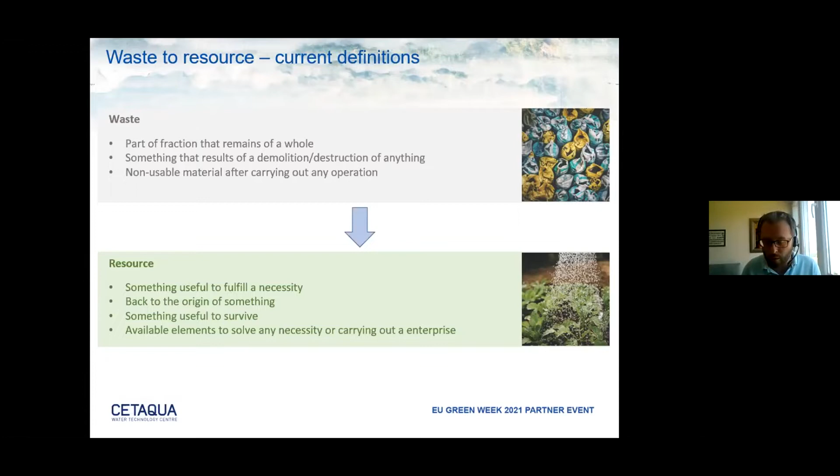As you know, waste is a fraction of a whole, or a material that is no longer used after some kind of activity has been performed. This should be part of the past. So we have to make our small contribution in order to make this circular and come up with resources. That is something useful in order to meet a need, or a good or service that is required to carry out something in particular or make something become real. So we want to do this, we want to turn waste into resources for different purposes.

At Cetaqua, coming from Agbar, we were historically tied to the comprehensive cycle of water treatment. In Santiago de Compostela, the Agbar center treats water from a comprehensive perspective, so that is our core business. These are the wastewater treatment plants. Little by little, we are moving towards the industrial sector, also placing an emphasis on wastewater facilities.

We are also trying to work on reclaiming water, stepping outside of the biological systems that normally prevail in water treatment and cleaning. So we do our best in order to use reclaimed water, that is to say water coming from households is cleaned, and then additional properties are put in order to use them for garden watering, for irrigation purposes, and also for street cleaning.

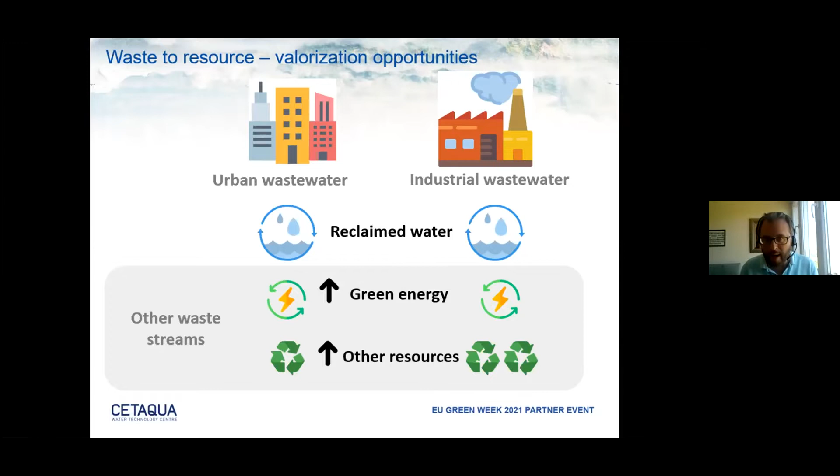We also do our best so that all the water coming from households can be caught in order to produce green energy by running some biological processes. So carbon can be turned into an energy generating gas. We also try to catch resources from solid urban waste. Martín Códax spoke about this already.

We are used to working in wastewater treatment plants that are mainly located in urban areas. Today, in Santiago or in any other Spanish city, normally we transport water from cities or from a certain source to cities. We spend a lot of money to treat that water, and then we bring that water back into its natural source. When modern facilities exist, created after 2020, we can reclaim water quite effectively and efficiently.

In this case, all the waste coming from these wastewater plants, that is to say the sludge, is subjected to an anaerobic process in order to obtain biogas, which is a source of energy that can be used either to produce electricity in the wastewater plant itself, or else it can be subjected to other processes in order to use it for other purposes.

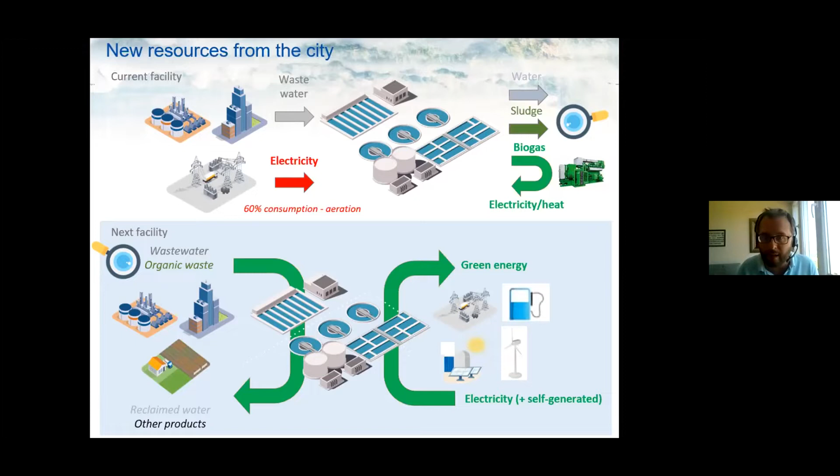In addition to carbon, we will also take into account nutrients that are found in wastewater. We will explore new ways of reclaiming phosphorus, for example, in order to produce fertilizers that require low application. That way we can use these fertilizers little by little in such a way that soil can better absorb all the fertilizer load without contaminating water layers, as happens today with the application of traditional fertilizers.

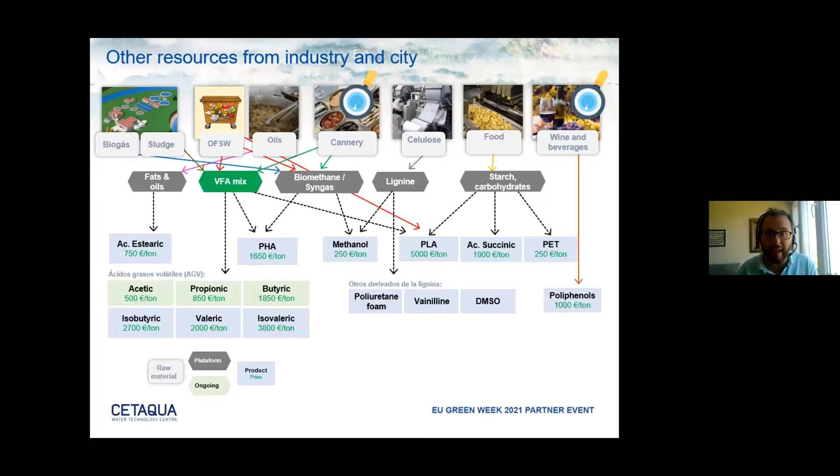As you can see here, there's a lot of theory behind reclaiming resources. There's a lot of scientific literature available on the matter. This is something that you can find in many databases. These are the different limits showing how far we can go. We know that we are not going to live forever, and therefore we need to make our small contribution by putting in place different initiatives in order to reclaim resources that today are considered to be waste. We can therefore keep them in the value chain, therefore reducing the exploitation of natural resources.

For instance, in the case of grapes, as we heard before, there are some compounds called polyphenols. The Cigat Biofactory project is working on polyphenols by applying a physical separation process. We want to run an ultrasound process in order to obtain polyphenols that can be applied in different industries. For example, polyphenols can be used as a raw material in other industries, such as in the food industry, in the cosmetics sector, or in food and beverages at large.

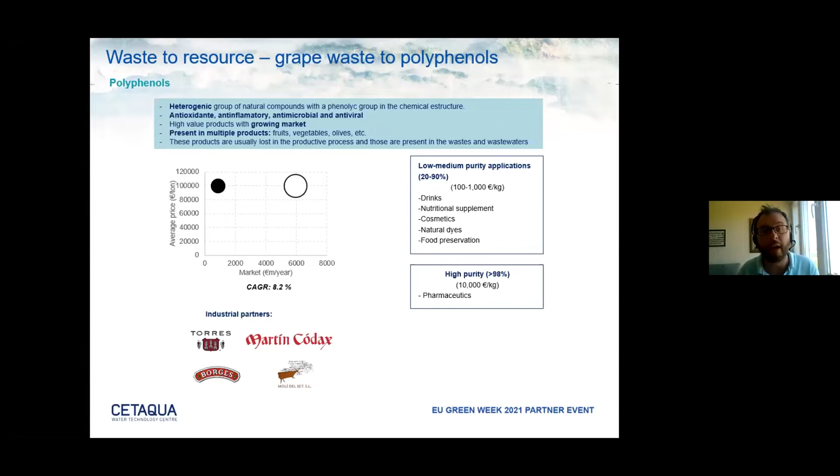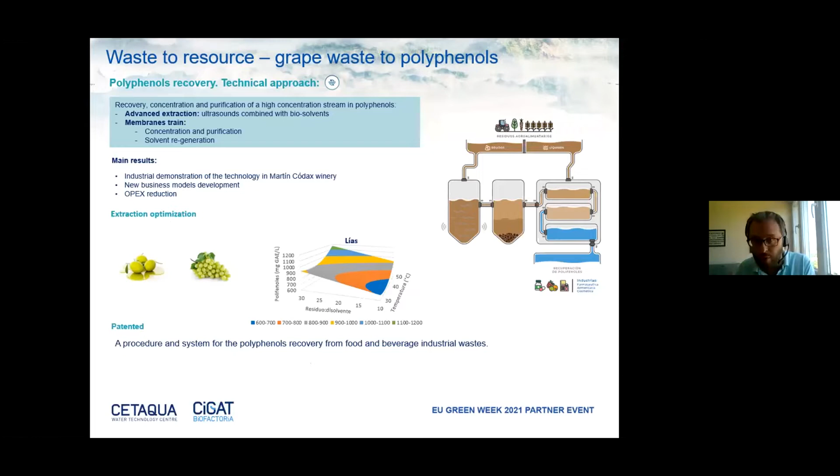Within the framework of the Conserval and the Cigat Biofactory project, we will be able to obtain what we call volatile fatty acids, or VFAs. For example, we will be able to obtain acetic, propionic, and butyric compounds that today are found in the petroleum industry, even though they are similar to petroleum chemistry. We want them to come from waste sources after an anaerobic fermentation process. We want to obtain these acetic, propionic, and butyric compounds by using biotechniques.

For example, in the case of the canning and the dairy sectors, we can apply a fermentation process followed by a separation process that we are now working on. We can also use biomembranes in order to obtain purity levels that can be as similar as possible to these compounds that today are found in the petroleum industry. The aim, therefore, is to have VFAs that can be marketed in other industries, for example, to produce bioplastics, polymers, and also oils and fuels.

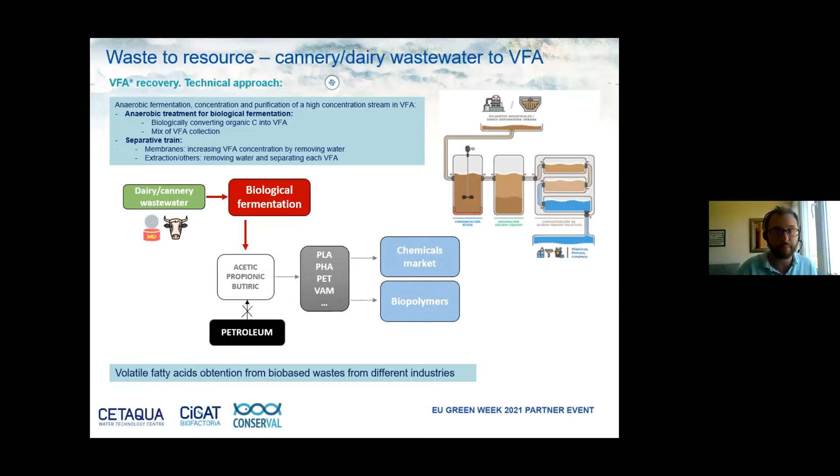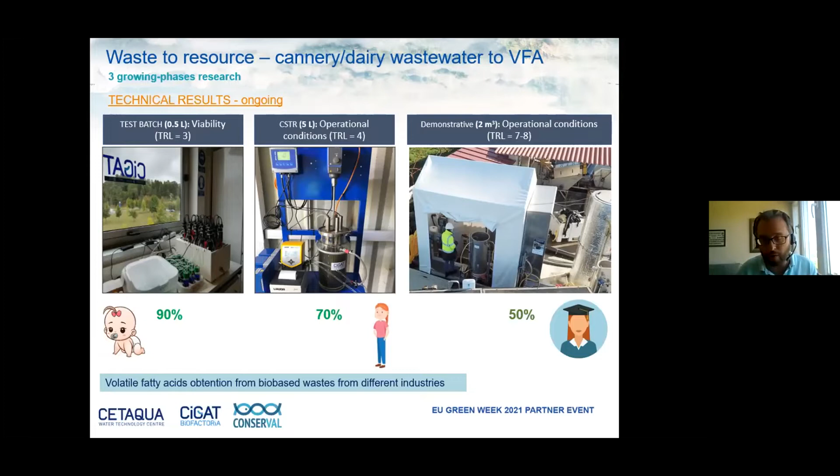What are we doing at present? We are still at an incipient stage. We are taking some baby steps. In the case of the canning and the dairy sector, we can turn VFAs up to 90% with different degrees of purity in each case. Now, if we move forward at a technical stage, we are doing this at 70%, and at pilot scale, we are transforming carbon at a rate of 50%, and we believe that this rate could be further increased. So we will be able to double the amount of carbon in the form of VFAs.

Cetaqua is well acquainted with water-related processes because we have more than 150 years of experience in this area. We know that sludge contains many resources that are not being exploited. So we believe that right now this is not being managed, or it's actually being managed as waste, but VFAs are not being obtained. Therefore, we want to start using not only industrial wastewater, but sludge coming from wastewater plants. We want to therefore create acetic, propionic, and butyric compounds. And we want to take one step further if possible.

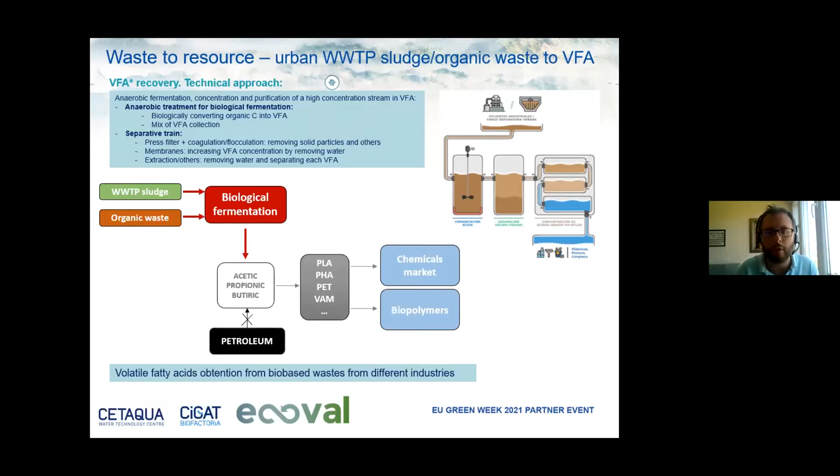In addition to sludge, we are also trying to aim at organic fraction solid waste processing. In addition to sludge, we would also like to introduce OFSW in order to increase the volume of VFAs. And that way, other industries will be able to obtain bioplastics, oils, and other consumer goods by using these resources.

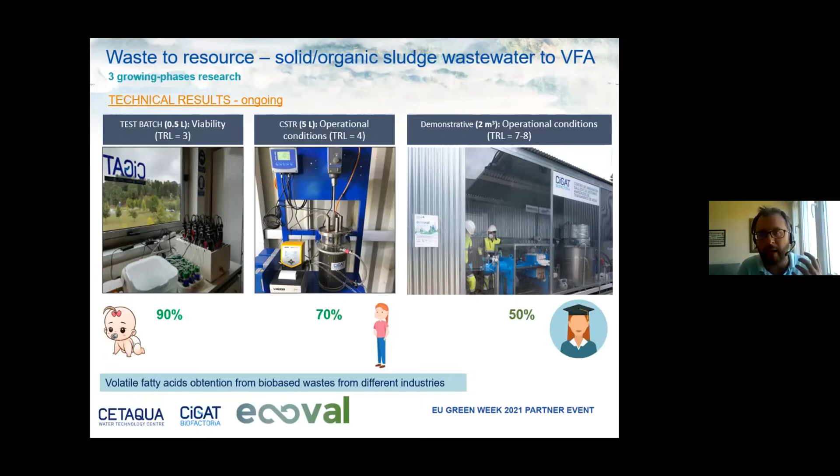We are also working on different experiments at a larger scale. We have also run some surveys, and we have obtained satisfactory results. We intend to increase, therefore, the resulting volume of VFAs.

In closing, just like some of my colleagues said before, all this experimental work is in line with the EU strategies, Madrid strategies, and the government of Galicia's strategy. Everything we are doing is intended to foster the circular economy, by putting in place all the actions that are being promoted by Brussels, Madrid, and Santiago, always in accordance with the European Green Deal,

and of course with an outlook on attaining the UN SDGs. And that's all.

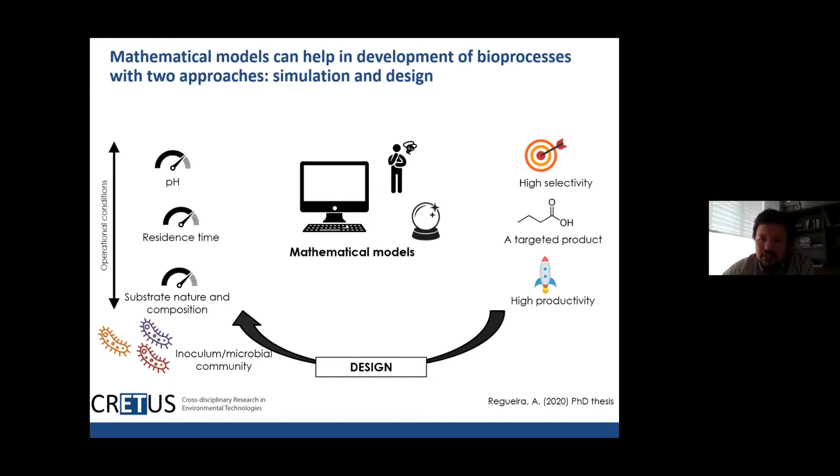And we have other ways of using these models by design. Let's suppose that I want a high selectivity of a certain compound, for example, of butyric acid in a particular product. What kind of waste can I use to get there? Under which conditions should I work? I know that this may sound kind of rocket science, so let me try to throw some light by giving you a concrete example.

These are the VFA biofactories that Álvaro also mentioned during his presentation. This biorefinery or factory for VFAs is an interesting concept because it's highly versatile. It can be used with different kinds of waste with little separation. It's highly flexible. And this flexibility eventually leads to obtaining VFAs, for example, acetic acid, propionic, butanoic acid, among others.

And the second step is to turn those intermediate products called platform-based products into a whole range of products that could be very useful. All these are chemical products that can be turned into fuel generating products, for example. They can be used to produce bioplastics, electricity, among others.

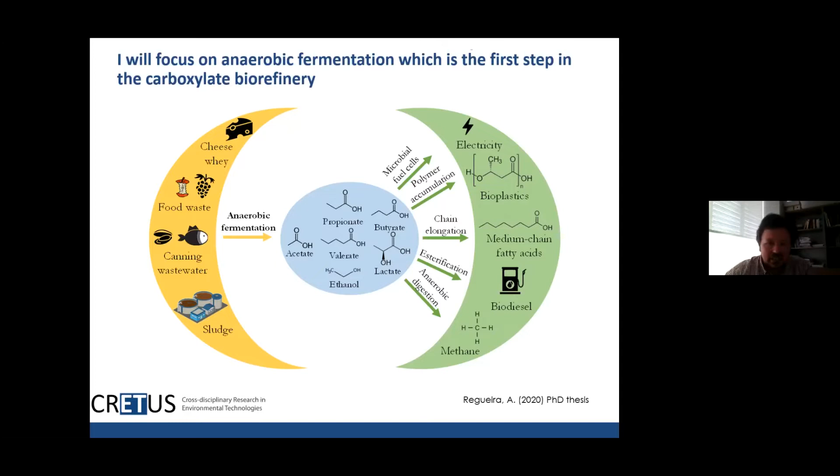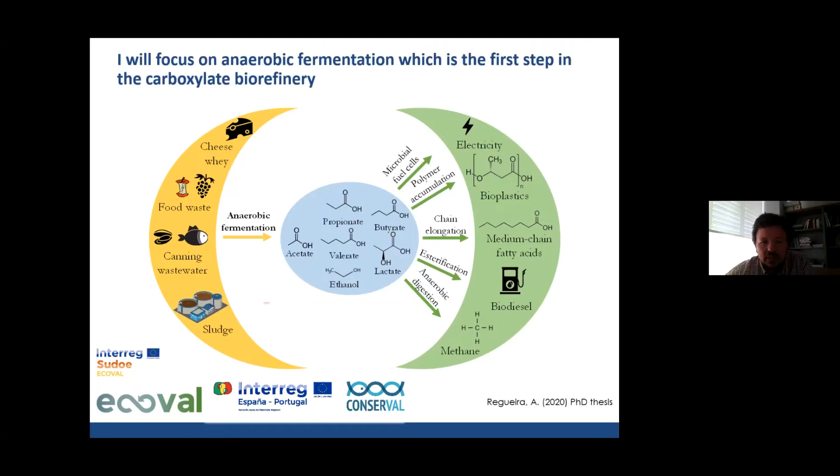At the University of Santiago de Compostela, in our center, we have been working for many years in designing processes for bioenergy. We are now working with Conserval and Ecoval. Álvaro also mentioned these projects before. The first step in carboxylate refineries has to do with anaerobic fermentation in order to transform organic matter into these end products. So how can we apply mathematical models in order to obtain VFAs?

The first step is anaerobic fermentation that leads to VFAs, but sometimes it's very difficult to predict. It's always going to be a mixture, and it's difficult to see which compounds will prevail, if any. Besides, these prevailing compounds may vary to a great extent and not in an obvious manner according to the substrate and the operating conditions.

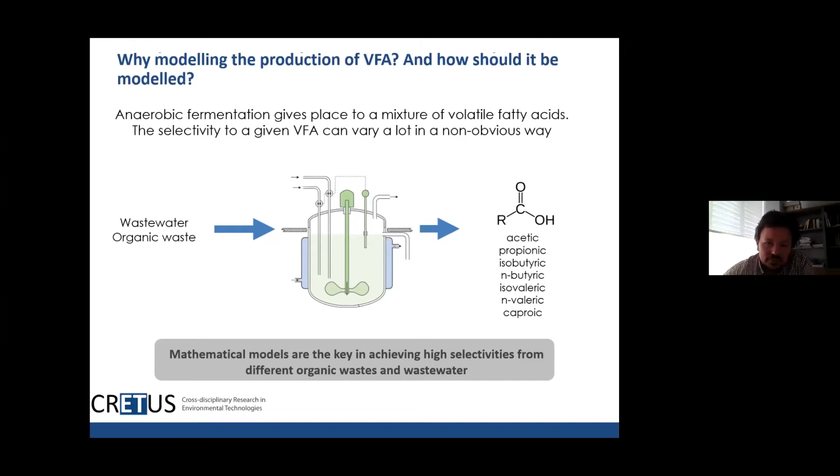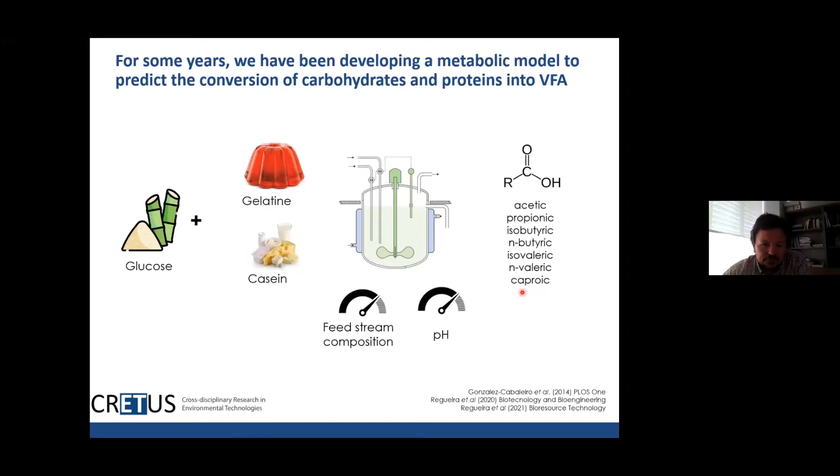We have worked to show that mathematical models can be key in predicting the products that could be eventually obtained with high selectivities in order to obtain products from recovered waste. For many years, we have been developing mathematical models at metabolic level in order to turn mainly carbohydrates or waste containing high levels of carbohydrates and proteins into VFAs. So this kind of waste eventually results in VFAs. These are the intermediate VFAs that we are interested in.

Well, we can apply a number of biological fundamentals. We know, for example, that in fermentation processes, these products are the ones that will allow cells to grow more or obtain the greatest amount of energy possible. As I said before, this can be depicted mathematically.

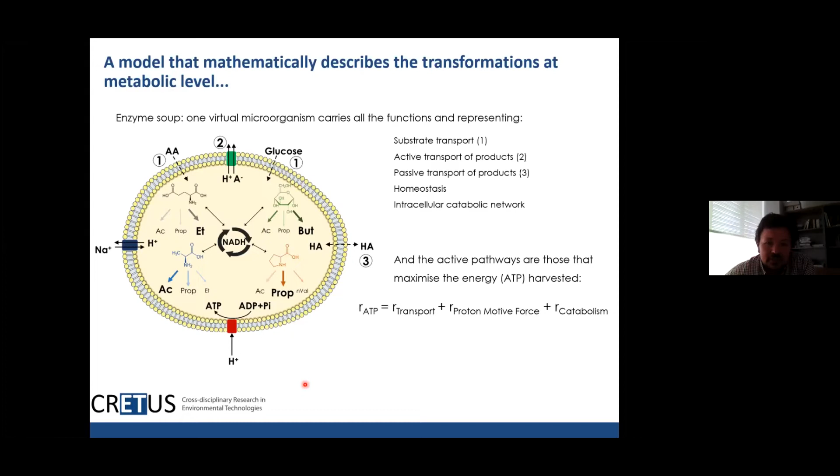So, of course, this can also be translated into more quantitative calculations. Within the framework of the Conserval project, we want to predict not only how VFAs are produced, but also how salinity in the wastewater of canning facilities will affect the production of VFAs. Therefore, we need to expand our mathematical models, taking into account the metabolic transformation carried out by microorganisms in their cells in order to face this salinity or saline accumulation that sometimes can be tough on microorganisms.

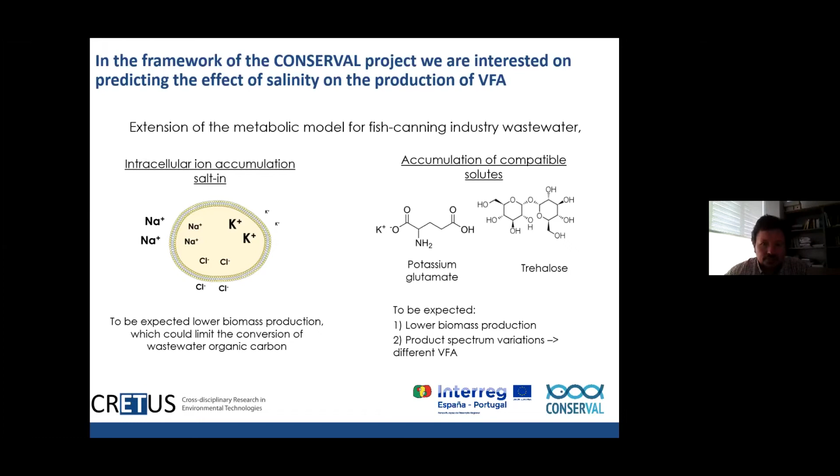Here we have represented different behaviors, mathematically speaking. For example, there is an adaptation strategy that is called salt-in. This means introducing other types of salts, like, for example, potassium ions to compensate the sodium ions, or else the accumulation of compatible solutes to allow cells to withstand salinity better. How can we tell, or how do we identify the strategy being followed by each cell?

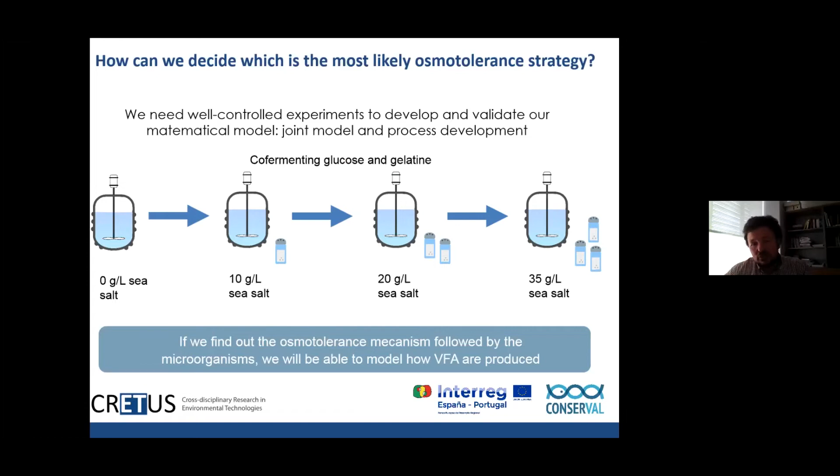Here we're trying to develop bioprocesses by applying mathematical models. So we will have to run experiments at the lab in order to validate all these models. We have some reactors used for fermentation, for example, for carbohydrates and proteins with different salt concentration levels, and that enable us under controlled conditions to learn which mechanisms are applied by microorganisms to see how they withstand salinity and how this affects the products that we are seeking to obtain.

So the salt-in strategy, for example, will not alter the VFAs that might result. That's quite interesting. However, the amount may be lower at the end, or they may be produced more slowly. We also know that producing an ex-novo compatible solute, these may be interesting compounds. For example, there are some products that can be used for cosmetic purposes. This, however, requires a high level of energy consumption by cells, and therefore this may lead to a reduced amount of VFAs.

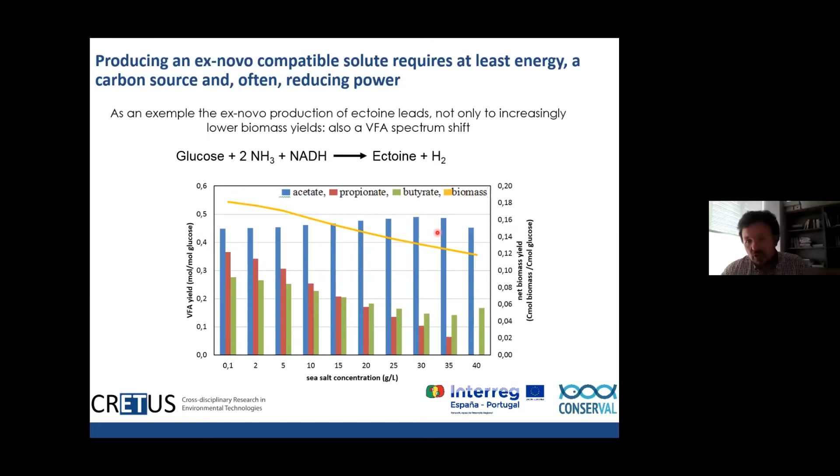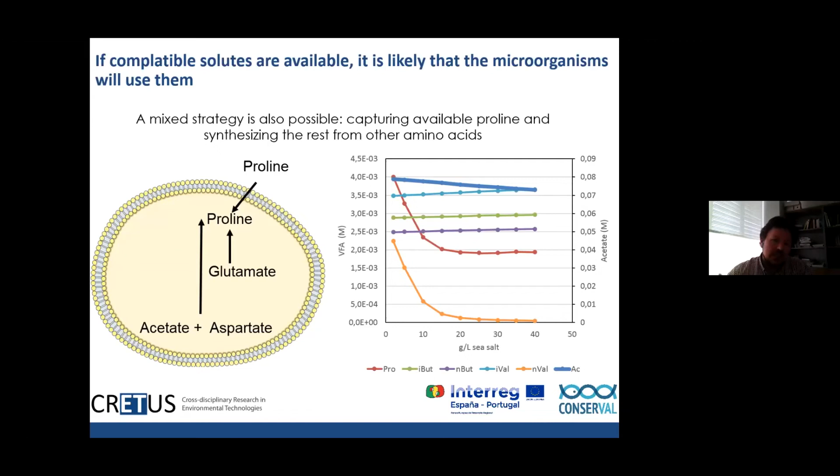Therefore, if the cell is producing this compatible solute, this happens with glucose, for example, we will go from a fermentation of this kind, that is acetate, propionate, and butyrate, to another one that will be more acetic. So we can have intermediate situations as well. We are using compatible solutes that can also be substrates, so the change of spectrum here will be different. By bringing all the experiments together and running our models, we can do some predictions as to what is going to happen. And how do we use this to develop bioprocesses?

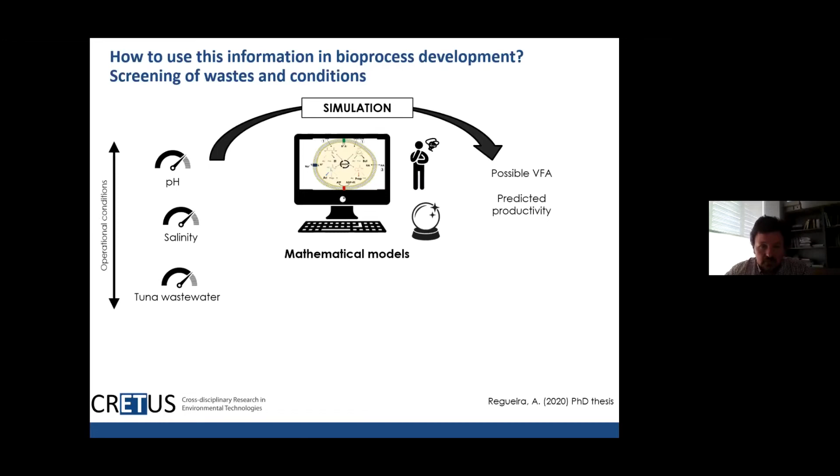As I mentioned before, we have simulation. We can screen the different wastes and the simulation conditions. We can try out different wastewater material from treatment plants, or, for example, organic matter from industrial facilities, or solid waste. Alternatively, by choosing a certain product and certain selection criteria, we can also decide how we can better mix different waste or residual sources, or whether we have to add a chemical compound that can act as a compatible solute so that microorganisms in canning water can withstand salinity.

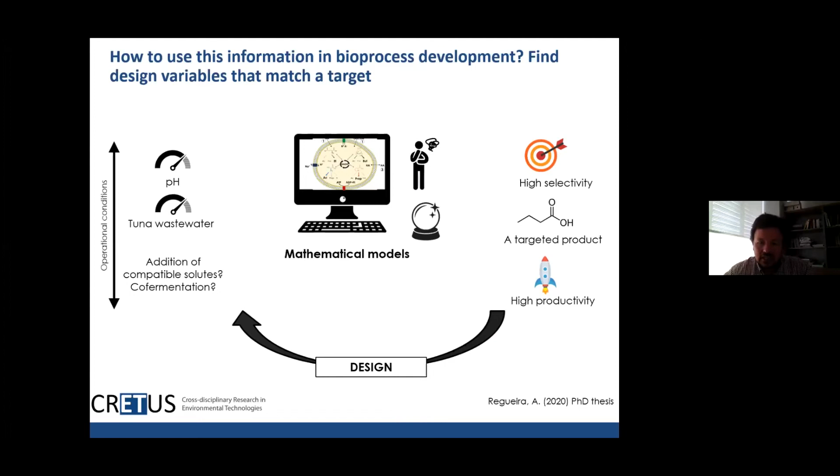Perhaps we have to use some kind of product with a high content of viscera. So by developing these models, we can produce much more effective processes contributing to the circular economy.

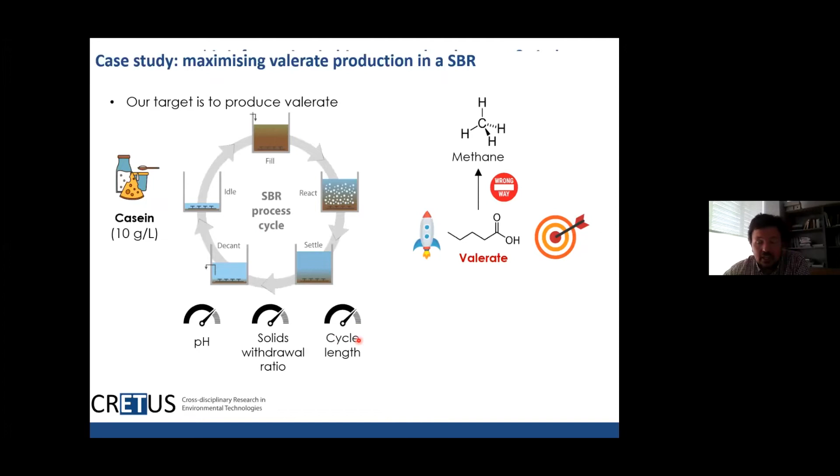This is another example. If we wanted to maximize valerate production in an SBR using wastewater containing a certain amount of casein, for example, water from a dairy producing plant, by changing the operation variables such as the pH or the solids withdrawal ratio or the cycle length, trying to produce valerate while avoiding producing methane. Well, according to the goal we pursue, here you can see the cycle length and the solids withdrawal ratio.

If our goal is to maximize selectivity so that we can turn waste into VFAs mainly, we will have to work at short cycles, at short withdrawal ratios, and with a pH near 5, where we have the maximum selectivity possible. However, if we have a different productivity aim, we are going to also work at short solids withdrawal ratio, but this is kind of risky because one portion can turn into methane if we deviate too much.

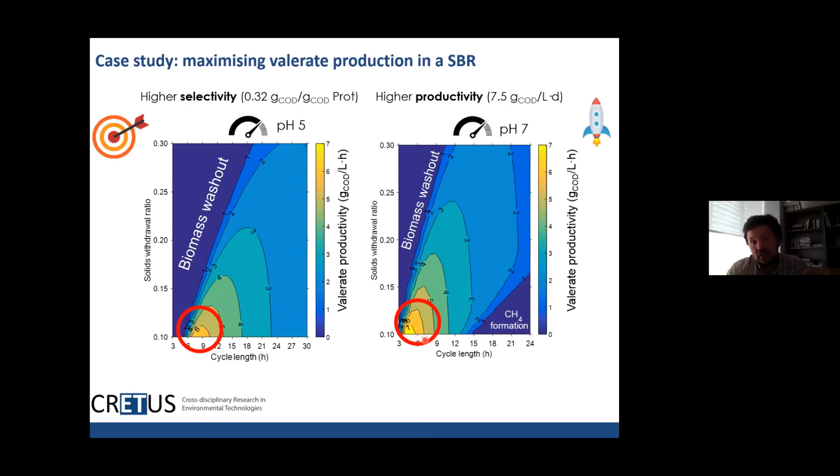Productivity, however, in this case would be higher in order to obtain this particular fatty acid. This is just a biological model with some inherent error. All the same, this might help us to check the pilot plant results, to reduce the range of the design variables, and therefore develop bioprocesses and get closer to attaining the goal set.

And in closing, I'm certain that we all know that developing bioprocesses is tough, but mathematical models can actually make it easier. In the case of the carboxylate biorefinery, it's quite flexible to turn waste into energy. Models can help us in improving selectivity in this case, while providing us better understanding and narrowing down the operational space, but experimental work will be required on the relevant variables and also in developing processes.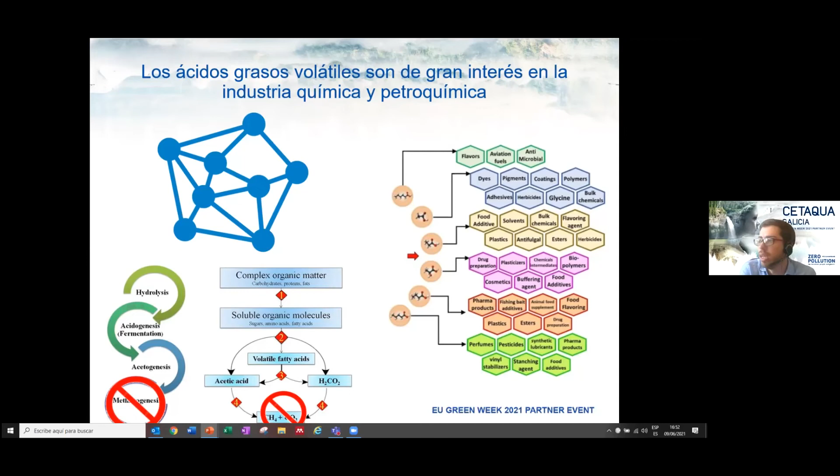We have as goals to continue with these models in order to implement them into other types of real waste, such as sludge, urban bio-waste, the canning industry waste, that have different types of organic compounds. So we were focused on how to produce fatty acids, selectivity, productivity, etc. But I'm going to focus now on what happens from that point. What happens once those fatty acids are produced and fermented?

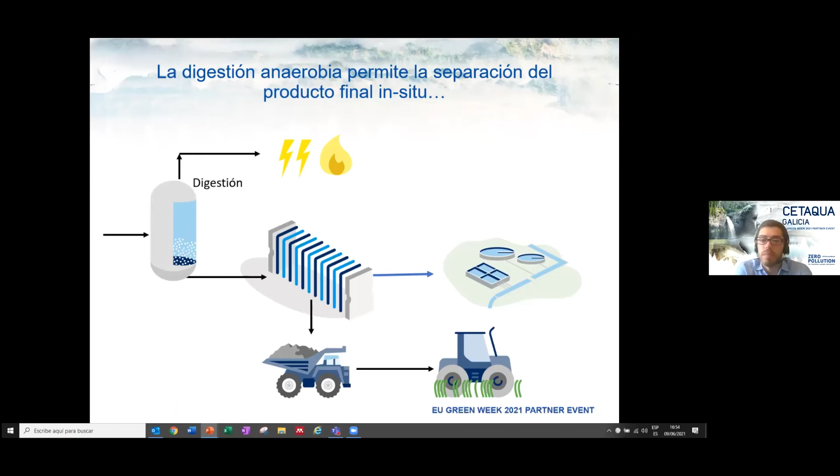There is a significant difference with the conventional process of anaerobic digestion. It is a process with 3 stages: solid, liquid, and gas, and we achieve an in situ separation of the product. Once the organic substratum has been turned into biogas, this biogas is separated from the medium where it is produced. For example, in a water treatment plant, this is used to generate electric or thermal power for the needs of the plant. Then the solid or semi-liquid part of the digestion can be dehydrated. The liquid one goes to the plant, and the solid one is used for agricultural purposes like fertilizers. So the entire process is used.

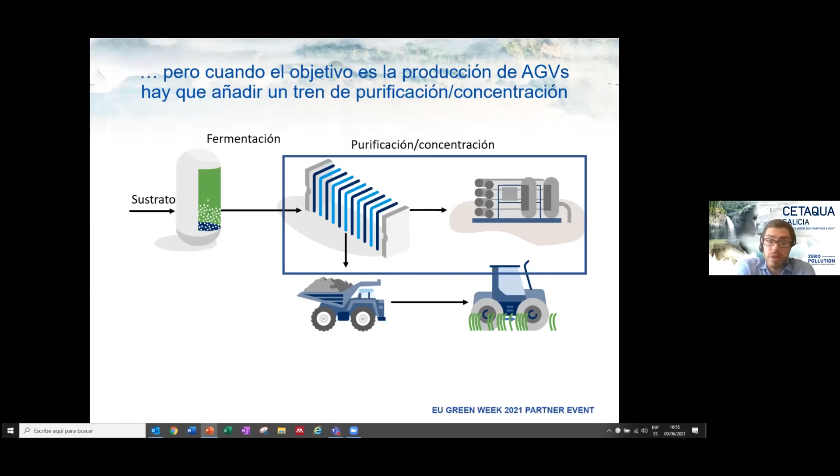And when the objective is the production of VFAs, we need to add something, because there is no in situ separation without applying energy, and this separation can be complicated because we are talking about a fermentation of sludge or bio-waste where we have a concentration of acids of 5, 6, 7, 8, 9, up to 10%. So in 1 ton of that output from the fermentor, we still get 900 kilograms of water. Separating that water is not easy.

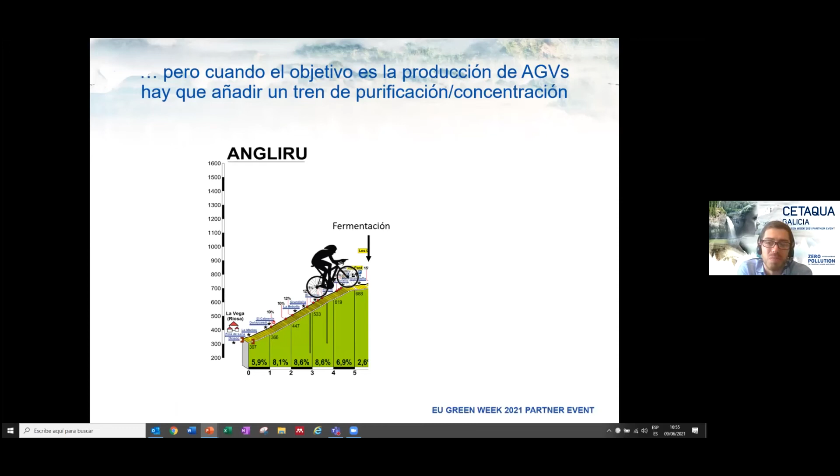So to give you an example, maybe you like cycling: when you are going up the mountain, you look back and you say, okay, the part that I already covered looks easier. But controlling the fermentation and stopping these reactions on the acids in order not to reach methane could be the easier part of the process for different reasons. For instance, because we are already there, so what we have already done looks easier.

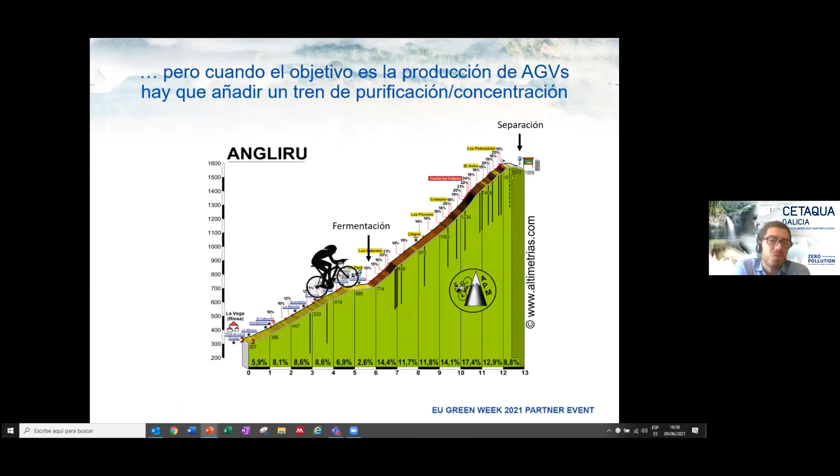But I'm going to be quick. I don't want to bore you with technical details. But the first difference with a biogas system could be that the dehydration of the sludge or bio-waste can be à la carte. So I'm going to explain myself. We get a solid stage with the waste that was not transformed, with the biomass that transformed it, and a liquid part with these VFAs and other types of compounds.

How do we achieve this separation to get solid and liquid stages? By adding chemical products such as surfactants or flocculants that interact with the negative parts that surround the sludge. So the sludge comes together and it separates from the rest. But the chemical products usually used in sludge management not only put together this solid part, but also, due to this electrostatic neutralization, they also take part of the soluble compounds.

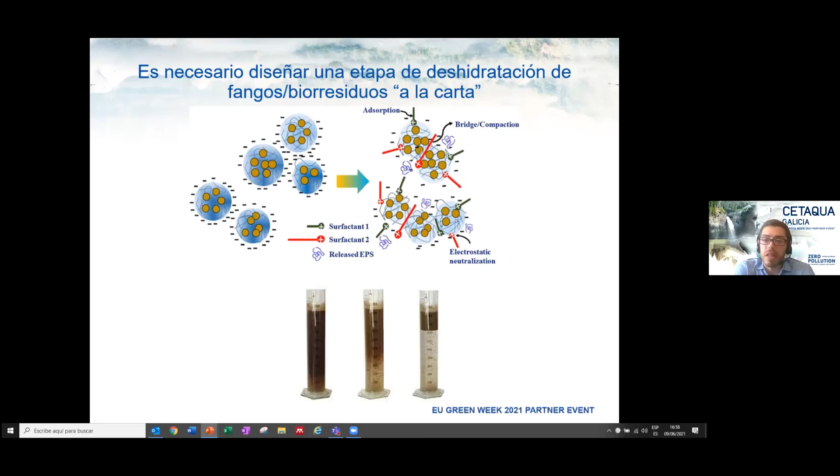So what we found is that conventional chemical products take those acids with them to the solid part, and therefore, if we can't separate them in the first stage, it makes no sense. Luckily there are other, more specific compounds. It is true that the precipitation of these acids is not prevented 100%, but we can reach 85%, 90% of separation in liquid mediums.

So we are talking about a concentration of acids of not more than 10%, and for final users like Repsol, for example, as Carolina was explaining, showing interest in new products, the quality criteria need a purity of more than 95%. So we need to add stages to concentrate and purify these acids. And I think that the technological development here is a little bit slow.

In the fermentation stage, we know that if we do a series of things with some parameters, we get fatty acids. Sometimes we don't know why, but we have other technical alternatives. One of them would be the application of micro, ultra, nano and reverse osmosis membranes: microfiltration to eliminate compounds like suspended solids that were not eliminated during the precipitation stage, ultra and nanofiltration for smaller compounds to be separated from the acids, and then a reverse osmosis process to withdraw the water from the system.

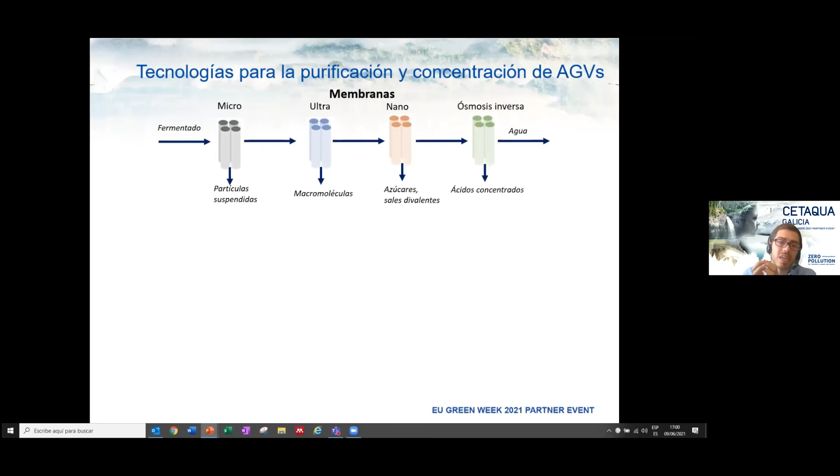This technological trend is being promoted, but the results right now show that we cannot reach the necessary concentrations to market this dissolution of volatile fatty acids.

Within the Conserval project, we are focusing on adsorption and desorption. The fermentation liquid is in contact with a surface that, given its chemical and physical characteristics, retains these VFAs, and the rest of the compounds can go through it. Once this surface is saturated, depending on the surface, with solutions such as ethanol, these acids are separated and recovered.

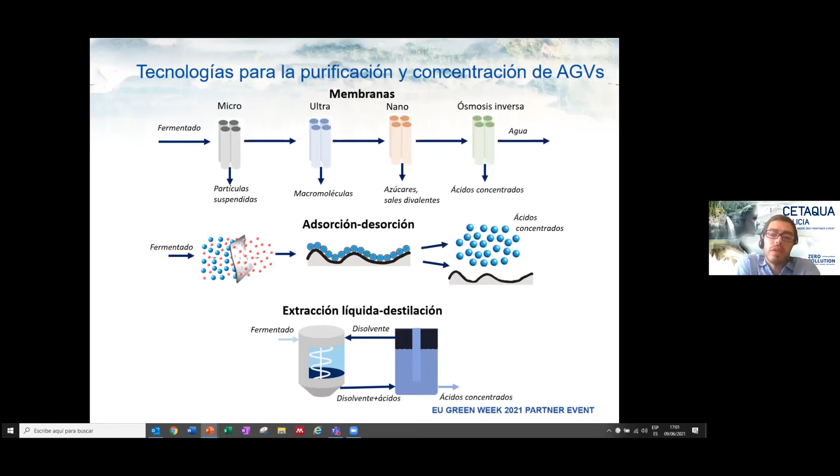And then a third example that we are promoting within the Ecoval and Conserval projects is liquid extraction and distillation. An example for less technical people would be when we mix water and oil. They do not mix; they separate into two phases. So this technology has an extraction part where we use an organic solvent that takes the volatile fatty acids to this organic phase, which could be the oil, and we obtain a product that is not interesting, which could be the water that was with the VFAs.

But then we need to separate the acids from this organic solvent. So a distillation column takes place, and there is an additional advantage here, because once the fatty acids have been separated from the solvent, this solvent goes back to the extraction column. This is the only way of having a feasible and economically viable system, because the solvent used, if it cannot be reused, could be more expensive than the acids produced.

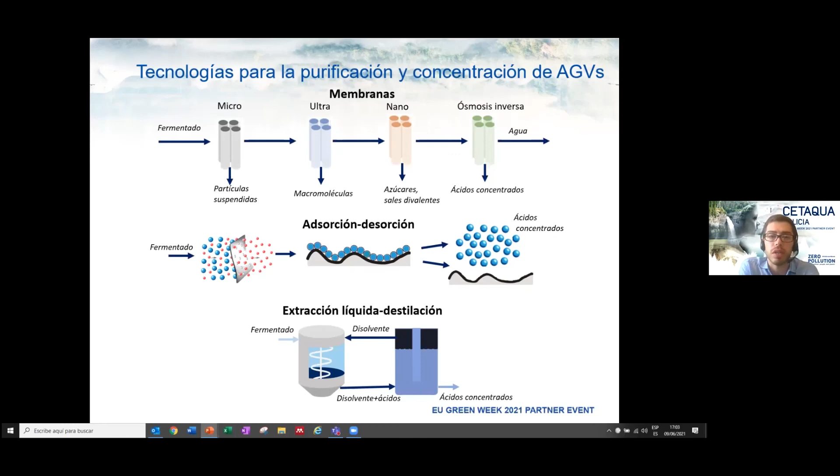It seems complicated in the short term that we will be able to separate individually the different acids produced, but we are quite optimistic about it. We can get a product with concentrated acids, but the proportion of acids in the final product will be the proportion obtained in fermentation. So I would like to stress the importance of metabolic and mathematical models to focus the fermentation towards a specific process depending on the market needs and the business models that you have.

So this would be my presentation. I just wanted to give you an idea. I think the technological development has always been focused on fermentation especially, but there are other technical borders that we need to overcome in order to market these products. Thank you very much for your attention.